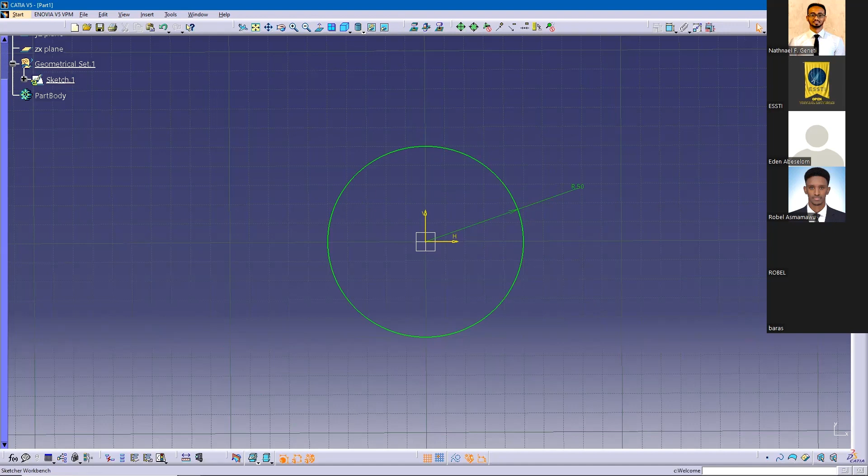Okay, and then what is it, as I told you from last time? Voila, you go out and then you press this button, and this is called a pad. You can increase the pad like this, and then if you press preview you will see the shape.

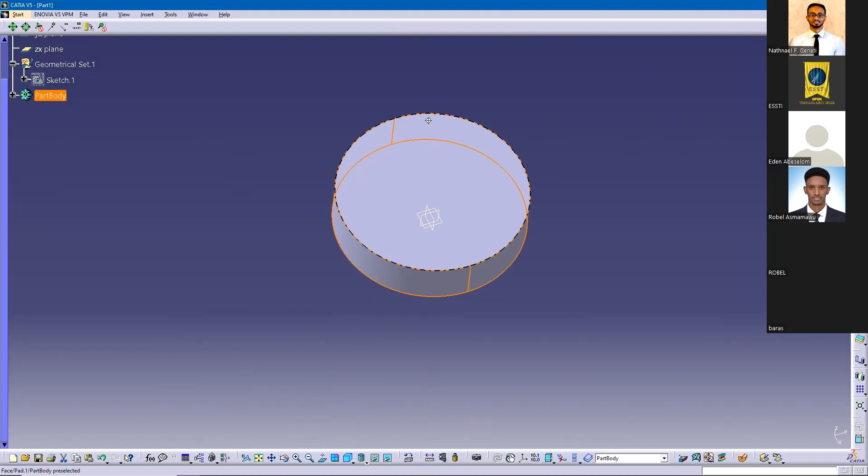Don't let it go. Okay, hold it together and then you just do like this. Okay, this is very important. This is how you manipulate, this is how you rotate a model in CATIA.

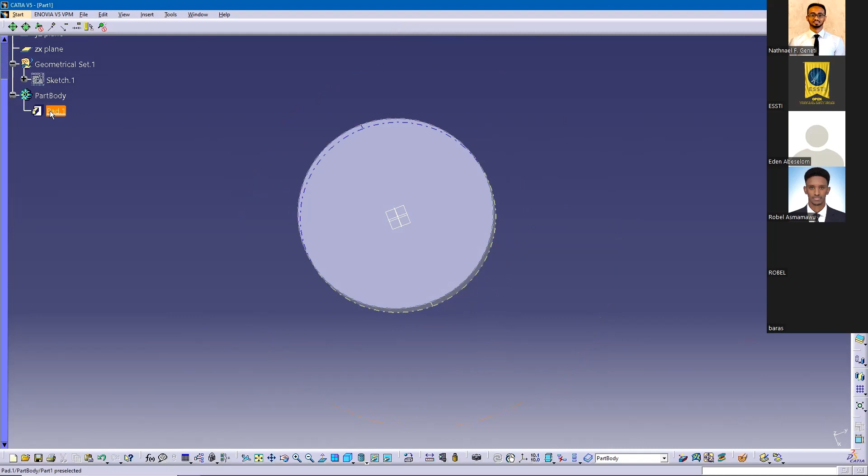How to create parameters and sketch, how to create parameters and how to create relationships. So first we have to go back to the sketch, okay? We have to go back to the sketch right here. And then let's hide the pad, okay? You can hide the pad from here, or you can go to the tree over here and just press this and then press the hide button like this.

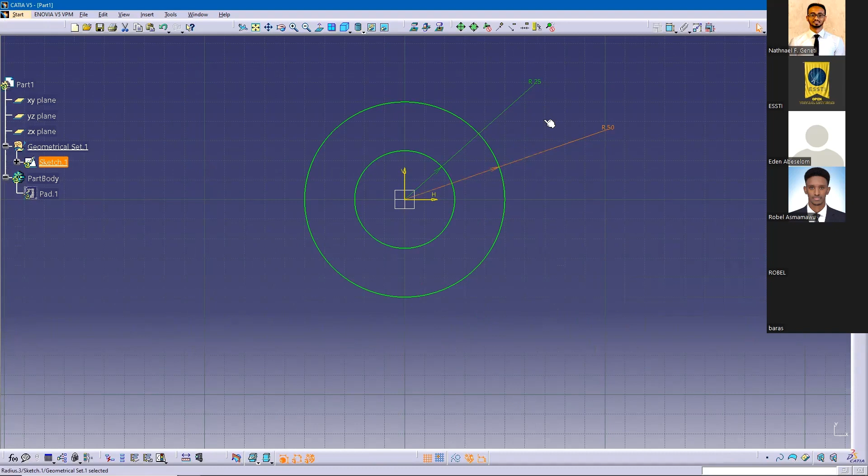So let's say I create another circle like this, right? And then let's give it a dimension, okay? Now let's change this dimension to, let's say 25, okay? So we have dimensioned it in terms of the radius. And now let's go out, okay? I want to show you this first.

From the last class, I've told you that in case something like this happens, press this button down here. Let me just bring it up right here so you can see it, and then press this button, okay? And then you'll be able to see the parts properly, or it will fit your screen. Now let's unhide this, and then let's zoom out a little bit.

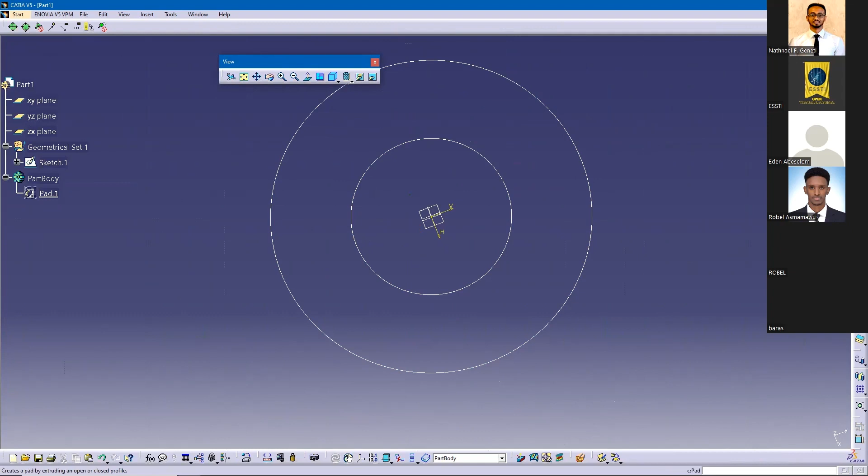So you can press the pad, okay? You can press the pad like this. Let me keep it right here. And then now we can select the sketch. Let's say we select these two, and now we say preview. Like this. And now let's unhide this. Okay, now we can see, right?

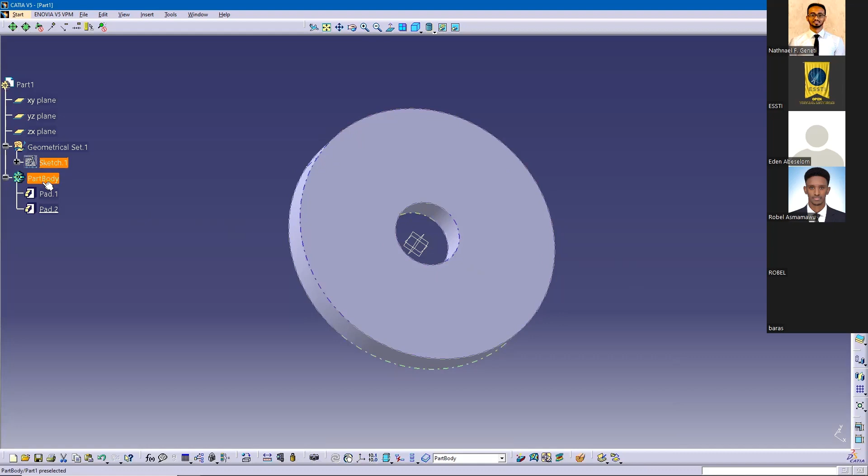Go back to the sketch. Let's hide the pad. And now, first, this button.

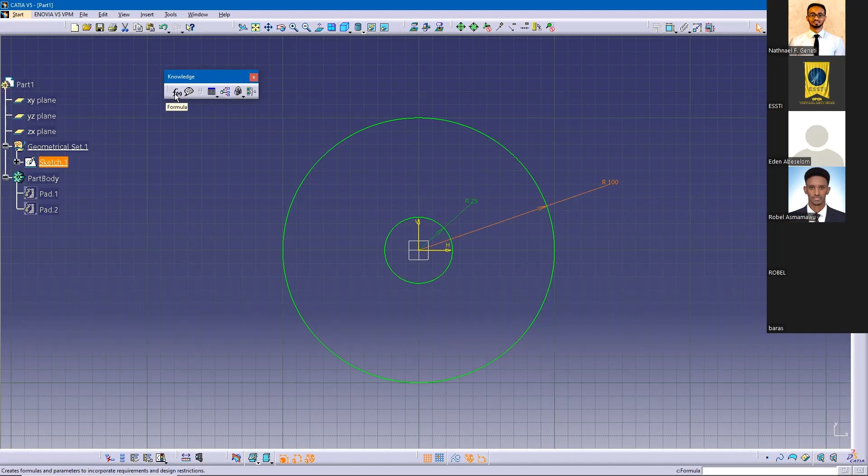This is probably one of the most important concepts that you should understand. This may be an intermediate course, but it's very intuitive to understand. So let's say I want to define all the dimensions in terms of the inner radius, okay? So to do that, I just press this. When I press this, you see it right here, right?

The Geometrical Set.1 / stuff, blah, blah. The value will be highlighted. That's what I'm trying to say. Now, once you highlight that, you can give it another name. Let's say RI, that's the inner radius. And then you press apply. So the name is now changed to RI. Earlier, the name was very long, right?

So it's going to be very, very difficult, because it's very messy. So this is how you change the name. And now let's say I select this one. After I select this one, you see right here, it will be highlighted. And now let's give this one another name. Let's name it RO, right?

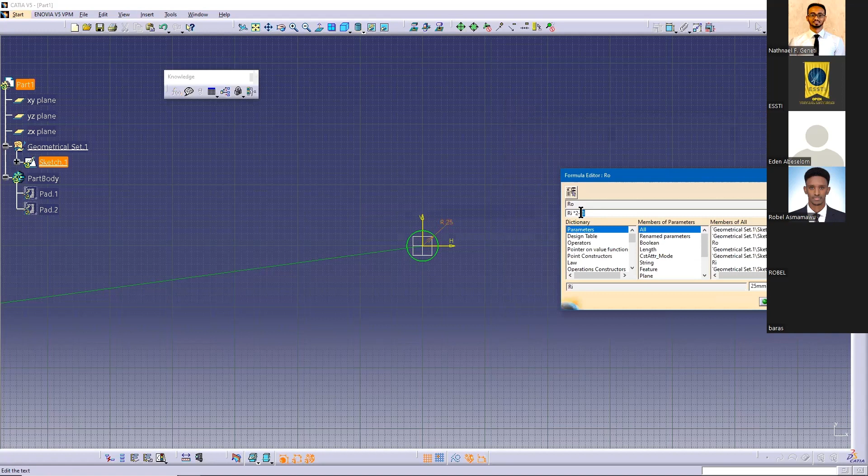And now, if I press OK, you see, it says there is something wrong with the syntax. Let me change that. Let's just forget about this one and multiply by 2 for now. Now, you see right here, the value is now 50. Earlier it was 100, now it's just 50. So there is some kind of relationship with the inner radius. So press apply and then you press OK.

And now, if you see right here, there is a symbol. It's very small, but it's an F with an X. That means this dimension is defined in a formula, and it's defined in terms of another dimension. How can I know whether it's defined in terms of another dimension? You just press it like this. When you press it, you see right here, it's grayed out. So what does this mean?

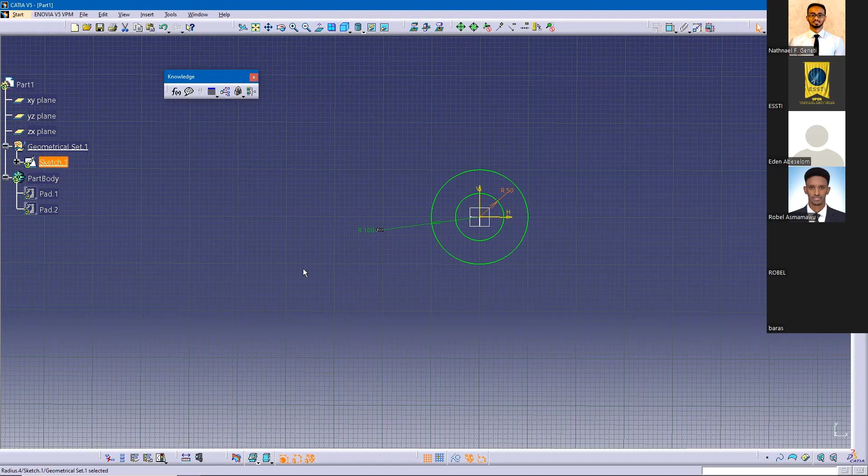If it is grayed out, it means you cannot change it right here. If you want to change it, you have to go here and press this one. And then let's make this one 50, and I press OK. You see right here, it will automatically update. So this is the power of using formulas. So now let's go out, press close, and let's say I want to show all the elements. You see right here, this is the power.

Something that I forgot to mention. Let's say I created a formula, right? So how can I access it? You want to be able to access it if you want to change the values or something like that.

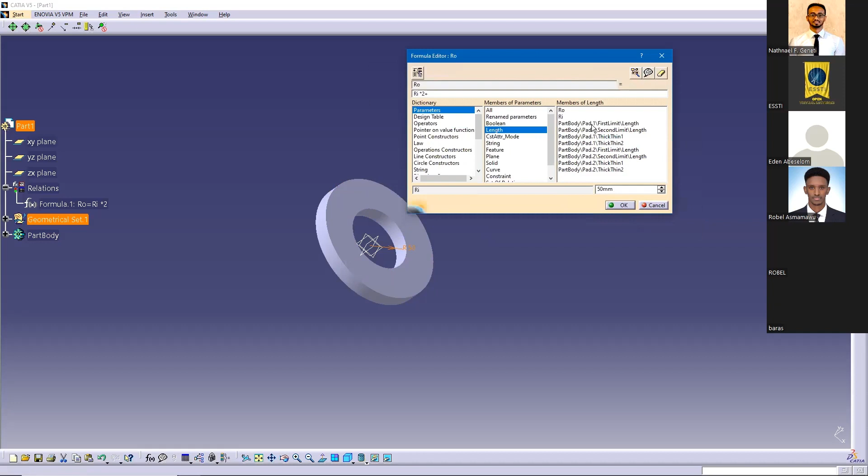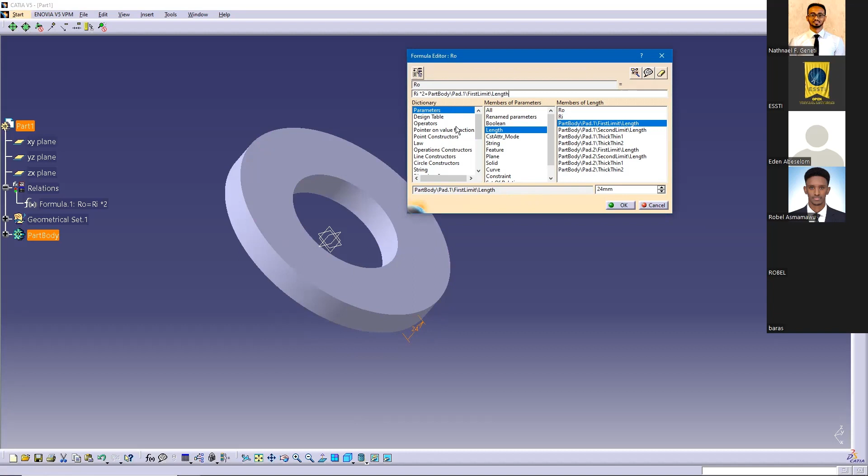And then bring it right here and let's create another. ለምሳሌ ኦኬ ብትሉት see the formula will be automatically updated ማለት ነው። እና በዚህ መልኩ you can use the relations and the formulas.

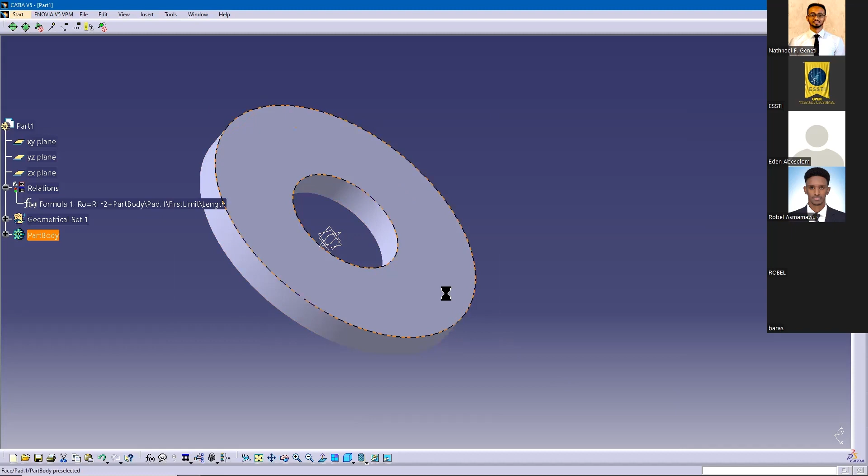So ይሄን ቪዲዮ ምናልባት በኋላ ለኮሆስት ይልክላታልና ይሄን ቪዲዮ እንድታዩት እመክራችኋለሁ ማለት ነው። Alright, so now let's finish this. Let's end this right here. እዚህ ጋር ያለውን ይሄን እንጨርስና maybe let's delete this. And let's delete this. You can also hide it if you want to. ሌላ ነገር ያው ስለምናወራ ብዬ ነው። Delete this, okay? So that's one point.

And now I want to show you the other modules that are available within CATIA, okay? በጣም obviously ማወቅ ያለባችሁ መጀመሪያ ከፓት ዲዛይን ቢሆንም that by itself is not enough. You must know other modules. Probably the most common ones that any mechanical engineer would use are the assembly design, the sheet metal design, the wireframe and surface design, and the generative sheet metal design. These are very common.

Let's say I want to put all of them together, because if you see right here, it's very messy. Like if you want to find generative sheet metal design, you have to go down like this, and that can be very tedious sometimes. How can I change that? Let's say እዚህ ጋር ክሊክ ሳደርገው በቀላሉ እዚህ ጋር እንዲመጣልኝ ማለት ነው። How can I create a shortcut? How can I do that?

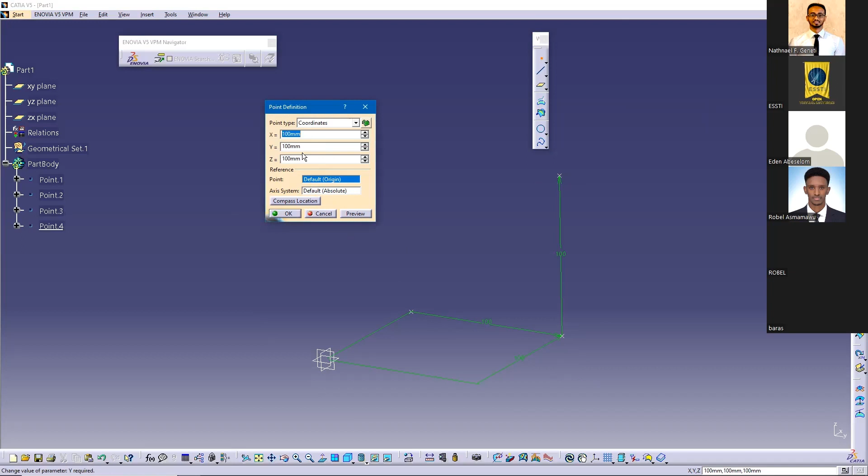And then what does x 100 millimeters mean? From that point it will go like this, another 100 millimeters, and then it will go up another 100 millimeters. Then the point will be right here. So this is the location of this point, and now you press OK, and it will just continue to give you another box. Let's keep this one as 0, let's keep this one as 0, and let's press preview. Okay, and now we have created enough points.

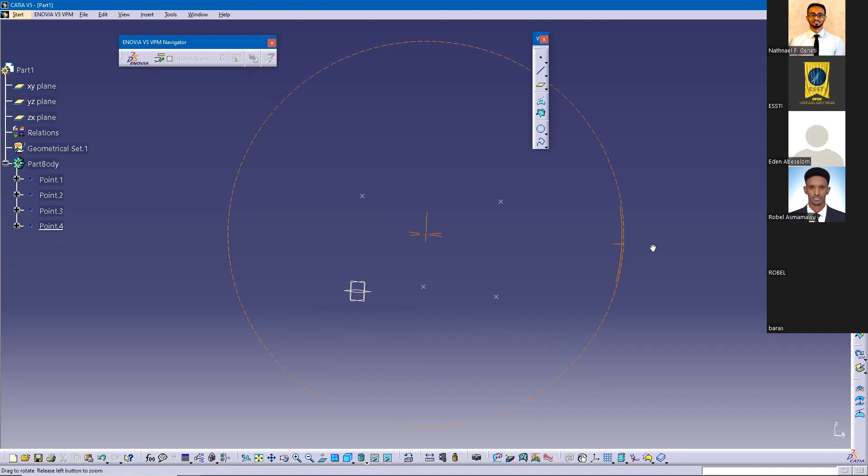Just press escape. Always remember, in CATIA or probably most software, the escape key is the key that you press when you want to finish any kind of command. Okay, so we have created 4 points, and now I'm going to create a line between these points.

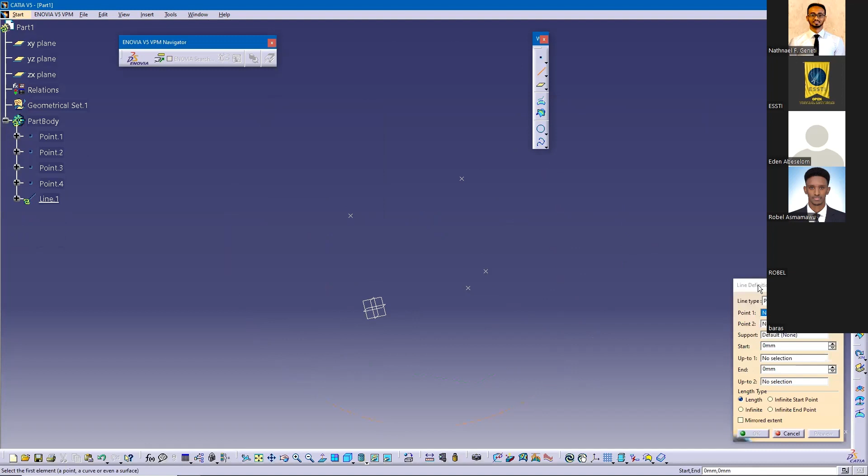So as I told you before, because right now I'm going to create multiple lines, I double click on the line, and now there are many different ways that you can define a line. So here, under the line type, you see point-point, point-direction, angle/normal to curve, tangent to curve, and many different kinds of definitions. I'm going to try to explain the first 3 or 4, and the rest you can explore by yourself.

Let's say point-point. So you press it, and here it will ask you the first point. Let's say this is our first point, and now it's going to ask you the next point. Let's say I'm going to pick a point here, and now you see we have created a line between point 1 and point 2. And now it's going to ask you for support. You could just leave it like this; the default is none. So let's press preview, and now we have created our lines.

And you can also extend this line outwards. You don't necessarily have to finish everything right here. To do that, you see right here the start and the end boxes. Let's say I increase this. See this point. The point is right here, but we are just increasing the length.

Or another way to do that is you go close to the start, and then you see the arrow right here. Press that, and then just drag it out like this. Same way on the other side. You go here, press this, and you can drag it out like this. This way you can create a line. This is one way to do that. What is the other way to create a line? The other way to create a line is a point and a direction.

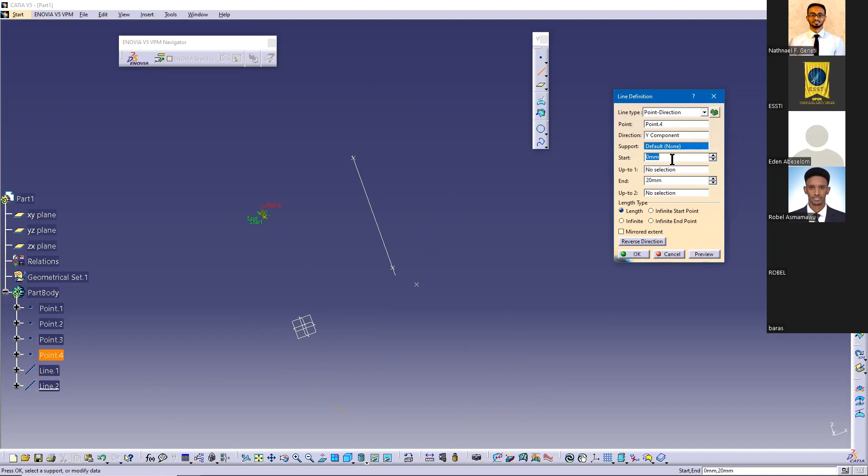So what does a point and a direction mean? Let's say I click this point, and now it's going to ask me for a direction. So here you can press the right click, and right here you're going to see many different options for defining a direction. We can select, let's say, the Y component, and now we just press preview.

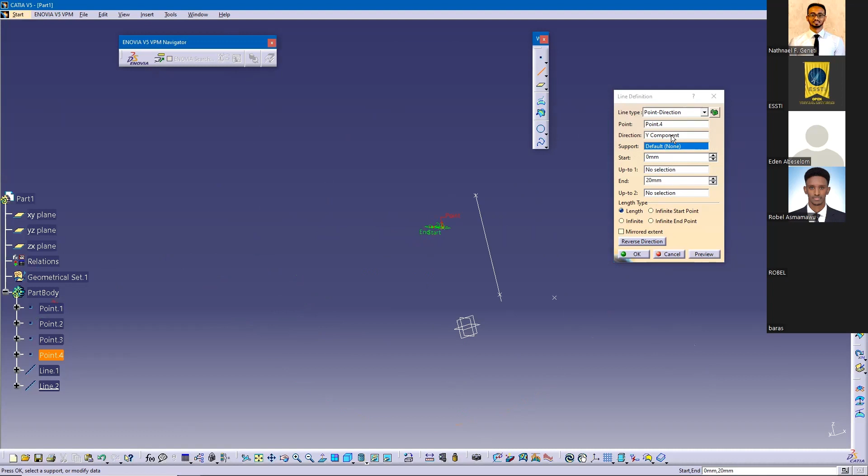Okay, so if you see right here, we have created a line with a length of 20 millimeters. In which direction? In the Y component direction. So what does the Y component direction mean? The Y component direction is the point's Y direction. Remember that.

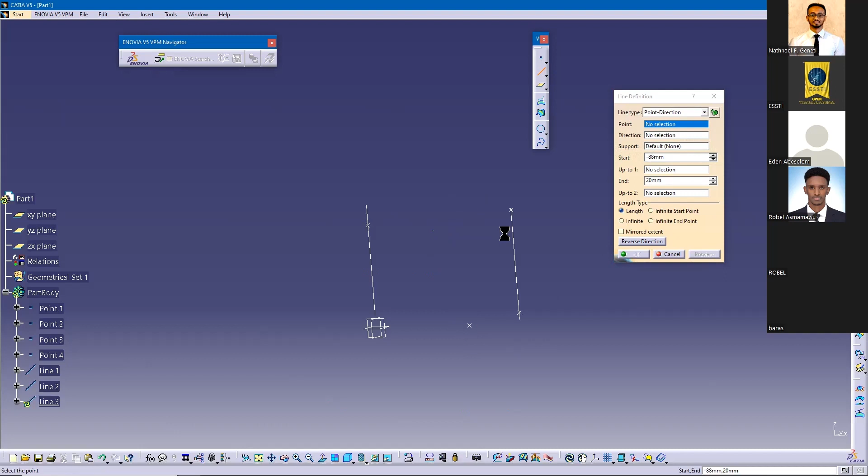What else can we do? You can also change the X component, or change it to the Z component. And now you can create a point like this, and you just drag it like this. And now you create another point, and then press OK. And now to save time, let me just go back to the point and just do this. All right, so let's just press escape.

One thing that I forgot to mention about points. To define a point, I told you that you can use the coordinate system, but there are also other options. Let's say you can press on curve. So what does on curve mean? You select the curve. Let's say this is a curve. By the way, a line is considered as a curve in CATIA. Please keep this in your notes. This is a very important point. A line is considered as a curve. A circle is also considered as a curve in CATIA.

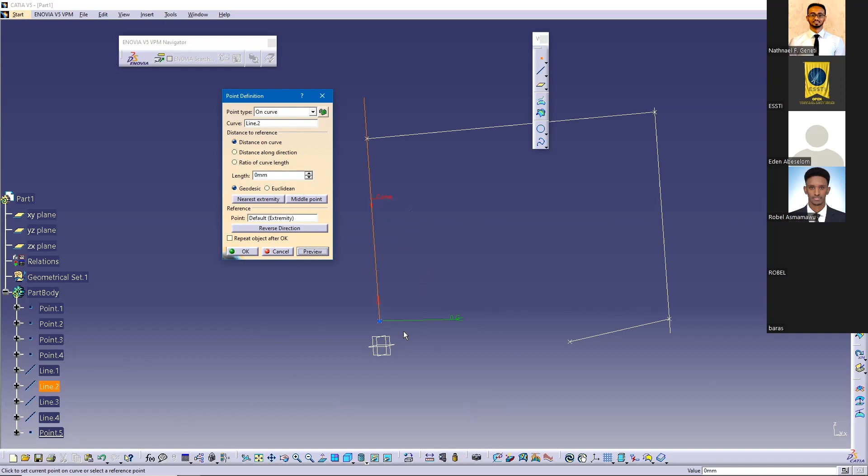So you press on curve, and now you can give it a length. Let's just give it 40, and now you press preview, and you create a point. Another thing you can do is press 0, and if you press 0, the point will be created at the start point of the line, and then you press OK. So we have created another point. So let's connect it. Press this point, press this point, and press OK. So we have created a 3D wireframe within the wireframe and surface design.

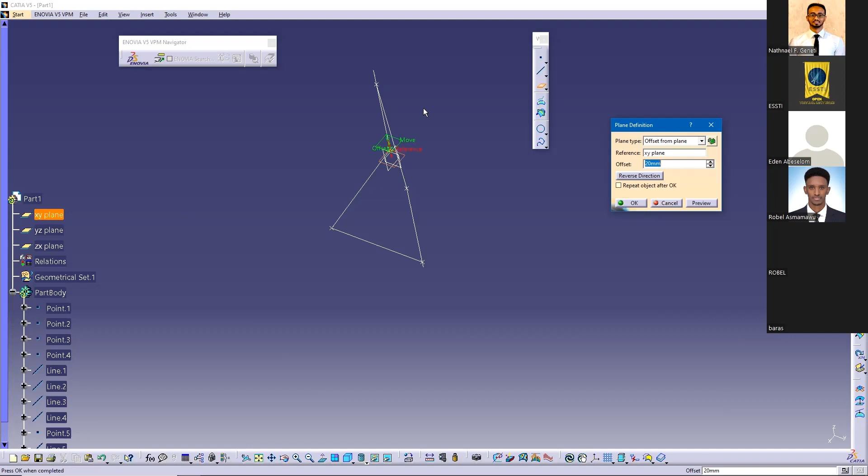The next step is I want to talk about the plane. What is the plane, and how to use it properly. So you press the plane, and here you will have this box. In the last lecture, I explained how to use the offset from plane. Let's say we have the X, the Y, and the Z plane, and now we want to create a plane that is parallel to the XY plane at a distance of 20 millimeters. To do that, for the reference, you press the right click and choose the XY plane. So you see this green plane. Now maybe you can increase it like this, and now we have created our first plane. This is the offset from plane method.

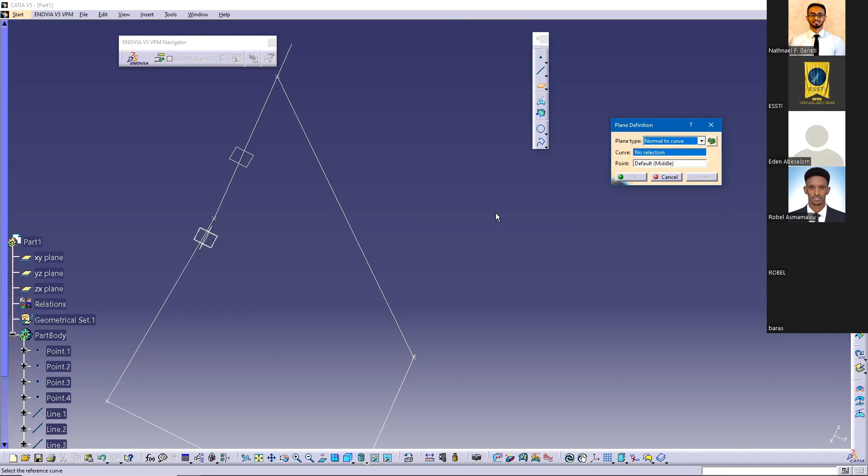Another method for creating a plane is a plane that is normal to curve. This is probably one of the most common commands within the CATIA software. You see this one, normal to curve, and now it's going to ask us which curve to use. So we can just select this one, for instance, and now it's going to create a plane that is normal to this line. But the default case is the middle of that line. But what if I want to keep it to the edges? To do that, after making sure that the point section is highlighted in blue, you can press this point, and it will automatically move to that specific point.

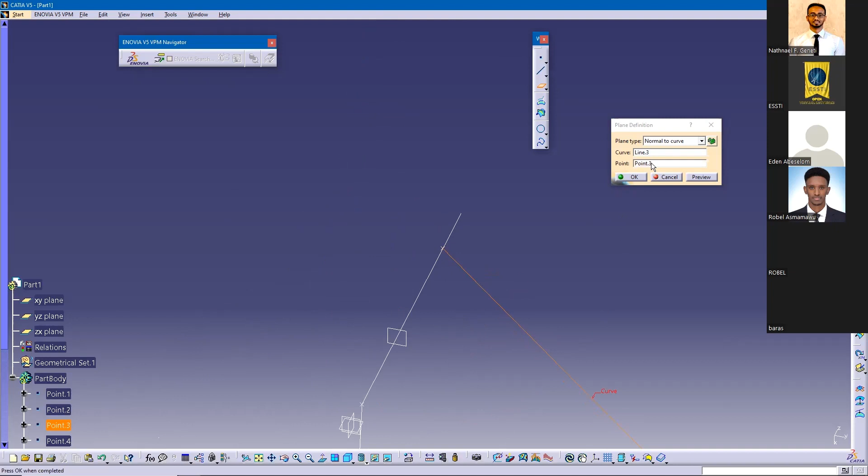Or let's say I want to move it right here. To do that, you just press this point, make sure that this is highlighted, and then press this point, and then it will be like this. So this is what you should do to get a plane in this way. Maybe I can show you one more. You can also create a plane through 3 points and through 2 lines. I want to show you a plane created through 3 points. So after you choose this option, you have to select the points.

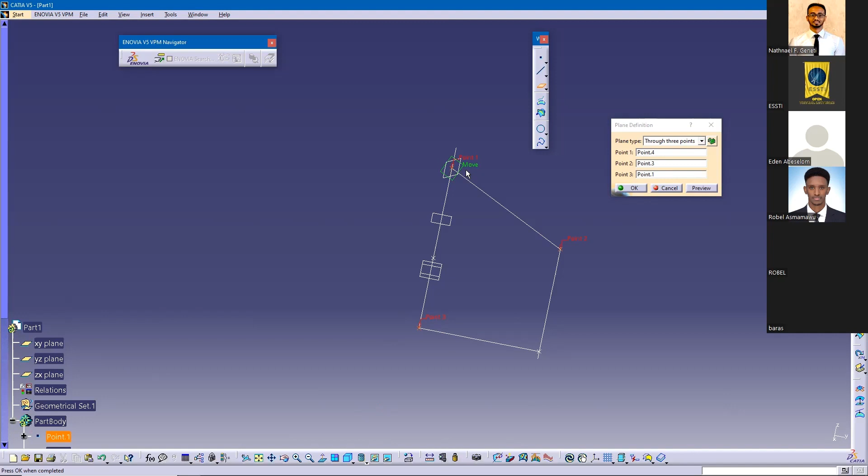To do that, after making sure that this is blue, now you select this point, second point, this one, and then you press this point, okay? So we have created a plane that goes through this point and this point, and automatically the plane is assigned to the first point, okay? And you can move it like this, maybe somewhere in the middle, something like this, and I press OK. Now you have created a plane that goes through each of these 3 points.

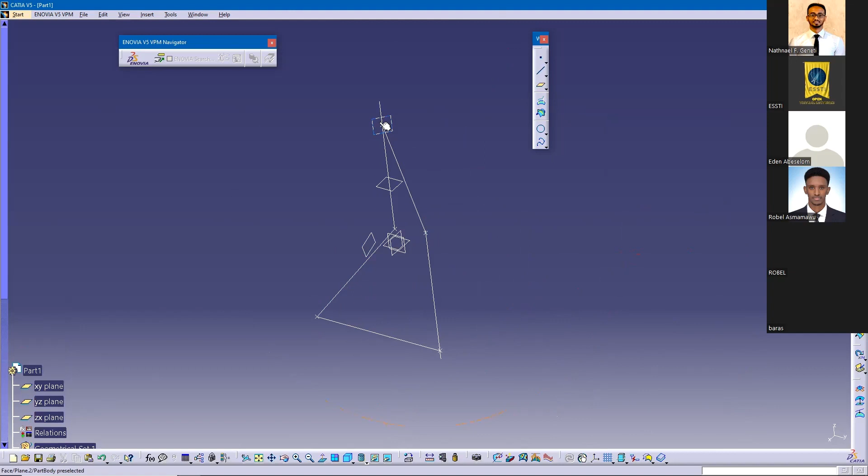So please, I highly advise anyone who's a beginner in CATIA to spend 1 month, 2 months, however long it takes to fully understand how to use the plane and the lines and the points properly. Because if you don't understand these 3, you'll never be able to make any meaningful progress within this CATIA software.

So let's just hide all of these planes. You can press hide, and also you can go to the specification tree and just select this one, hide, and hide, okay? So this way you will be able to make points and lines and planes.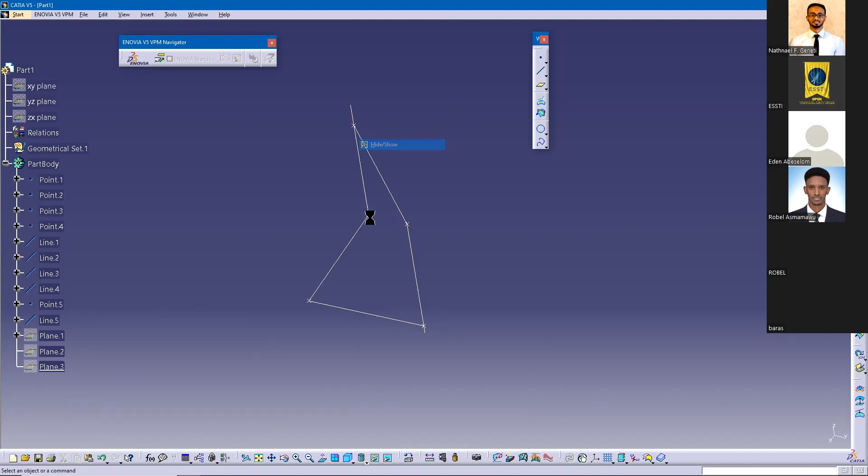All right, so the next step is let's now go to another important surface-based features, okay? So in the part menu, we had surface-based features. In the wireframe and surface design menu, we have the same features. So I'm going to try to explain some of them to the best of my knowledge. So the first one is called the extrude, right?

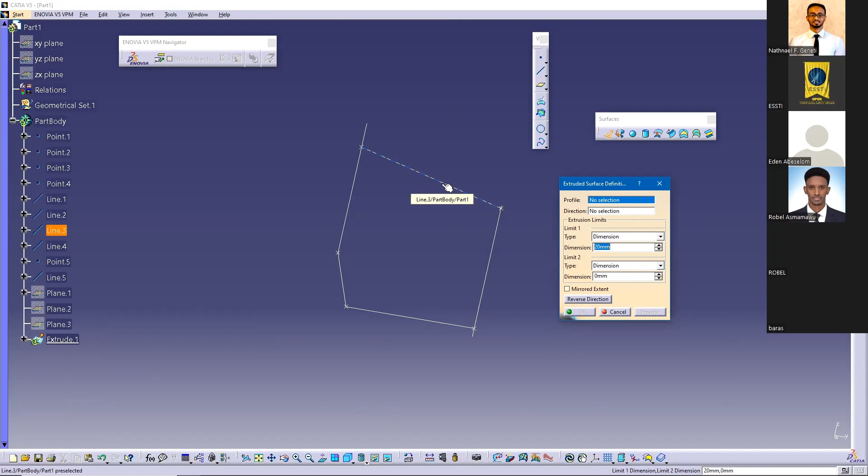So when you click the extrude, a new window will pop up like this, and now we have to select the profile that we want to extrude. Extrude means you are trying to create a surface that goes through that specific curve that you created. So let's say we click this line, and now we have to select the direction. Let's say I select the X direction. And now we can make it mirrored so that it goes both ways.

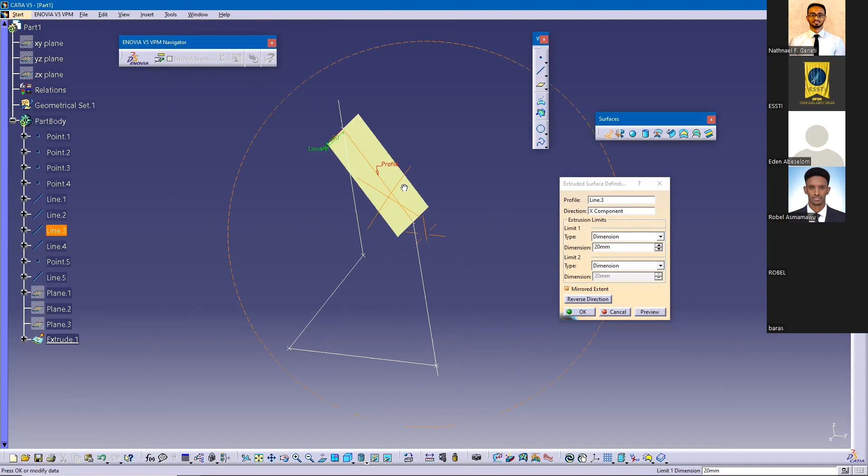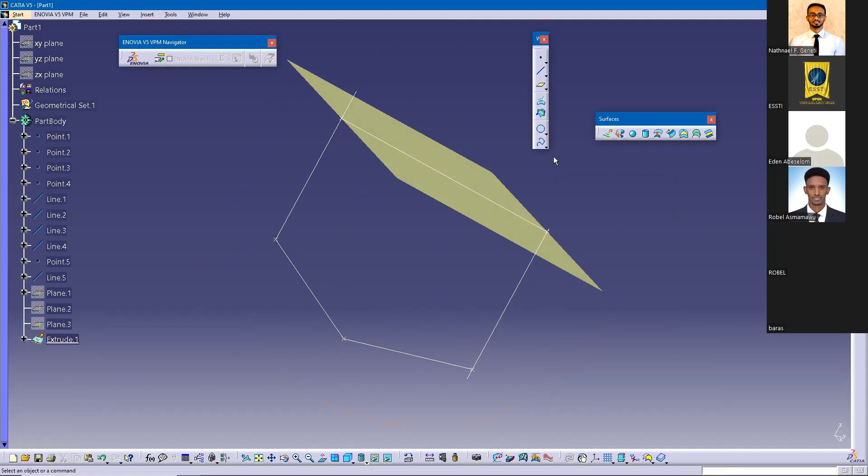Now we can increase the dimensions like this, and now you'll be able to see a surface that has been extruded based on this command, and you press OK. See, this is the first method for the surfaces toolbar.

All right, so maybe I'm gonna delete this and show you this icon. This is called the fill icon. It's also a very common command that people use, especially mechanical engineers and aerospace engineers.

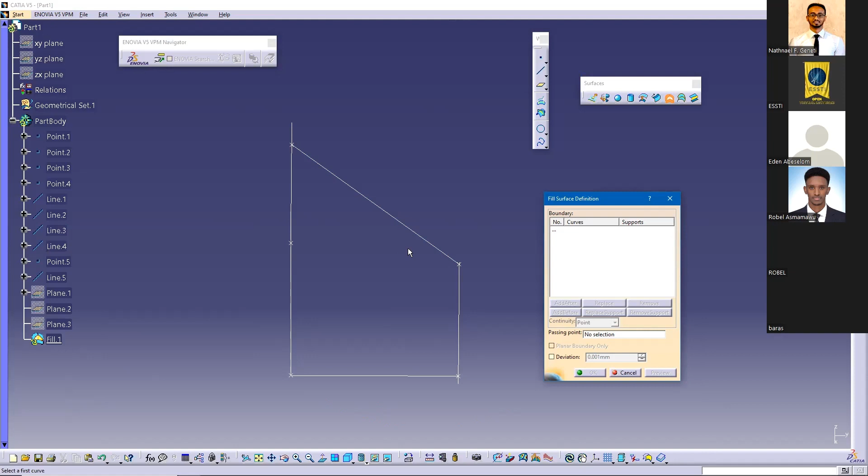So you select this line, and now you have to select the lines sequentially. That means you cannot just select this line and select this line and go to here and go to here. You have to do it sequentially. If you're going this way, good. If you're going this way, that's also good. Whether it's clockwise or anti-clockwise, that's okay. But make sure that they are selected sequentially. So let's go this way.

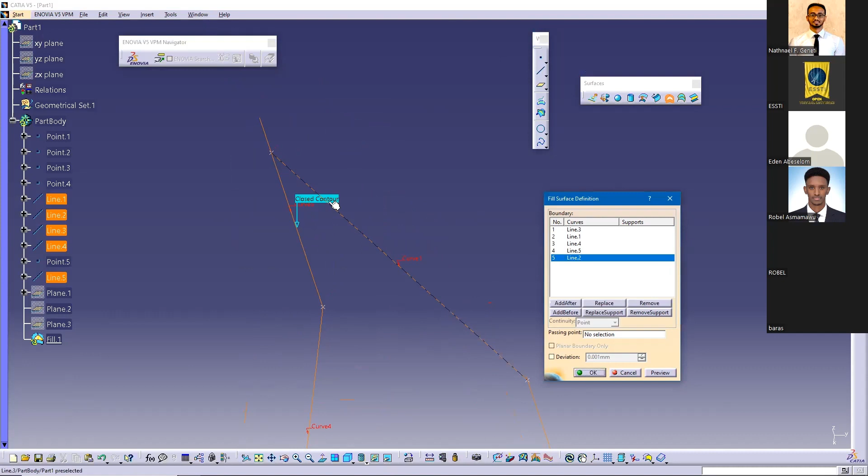You see, when I select the lines of the curves, they will appear right here in their order. 1, 2, and now this line 4 will be number 3, and then line 5 will be number 4, and then this will be our last line. When you do that properly, you see, the closed contour will appear. That means you have done a good job and you have made a closed contour. So after you do that, you press preview. Okay, so you have created your first surface.

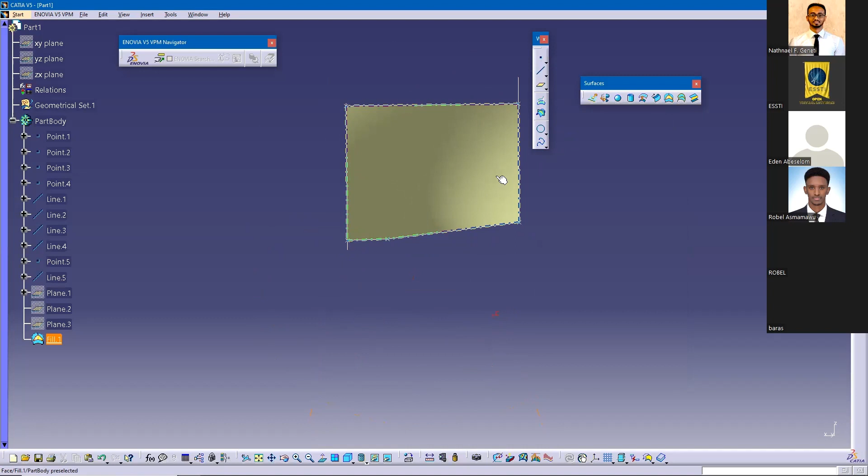The wireframe and surface design and the generative shape design is highly employed for car designs and, let's say, jet designs. This is very commonly used, so you really need to spend some time to understand these two modules properly.

So I have been talking for 48 minutes. Everyone, are you following me? Do you have any questions, or do you want to take a break? Hello, everyone. Mr. Machino?

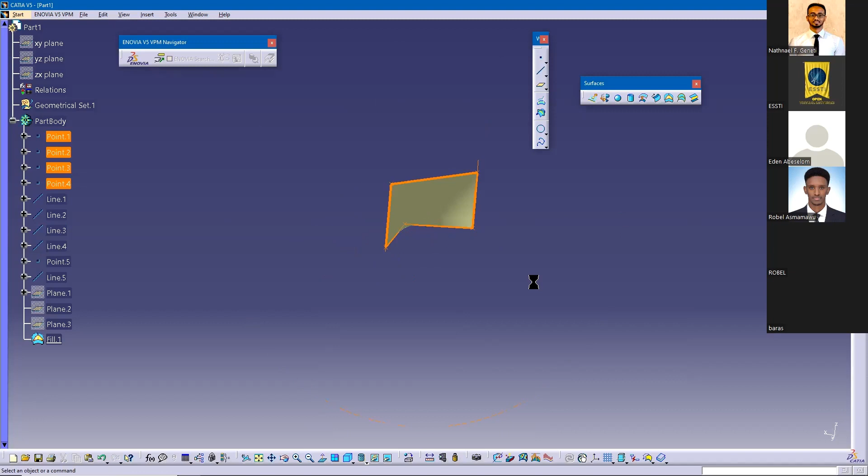I'm going to continue. So what I want to show you next is, let's remove all of this.

I want to show you the other tools. What are these tools? The sphere and the cylinder. The sphere is basically you're creating a sphere, but you have to create the center for it. For the center, you can press create point, and now it will take you to this point definition, or maybe you can just use the coordinate system. Let's say I'm going to give it just 0 millimeters, preview, and now I press OK.

So we have created the center for this sphere, and we also have to select the axis for it. The axis is automatically selected by default, but in case you have multiple axes, this is where you're going to change your axis. And for the radius, you can give it higher values. Let's say 100 millimeters. And then, see right here, the sphere limitations.

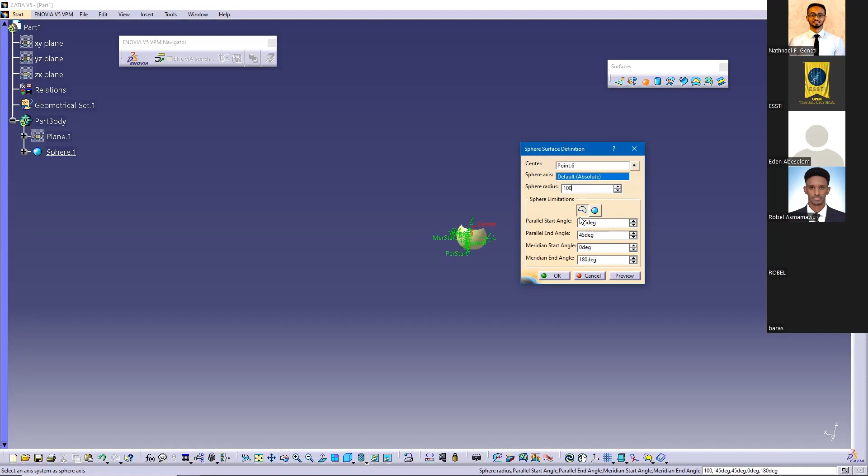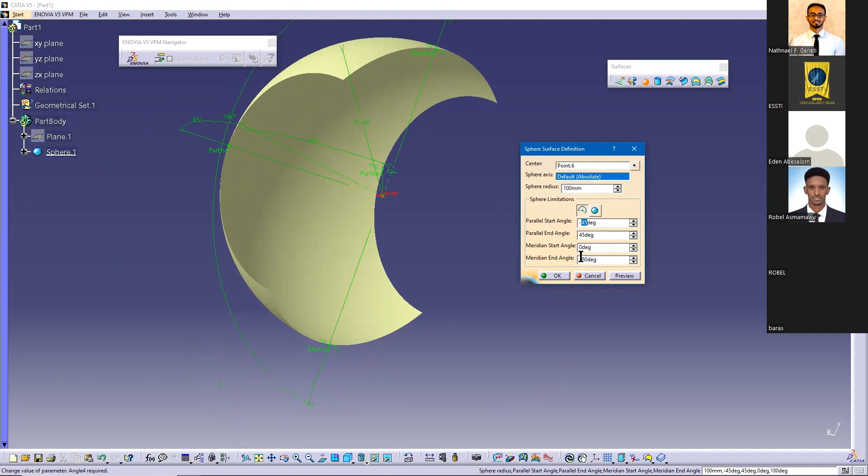There are two options. You can create a full sphere, like a ball or something, or you can create something like a half sphere or anything. It's up to you to decide the limits for each edge. To do that, right here you can select. Let's say I'm going to make this one 60 degrees, and you press preview. This is what happens.

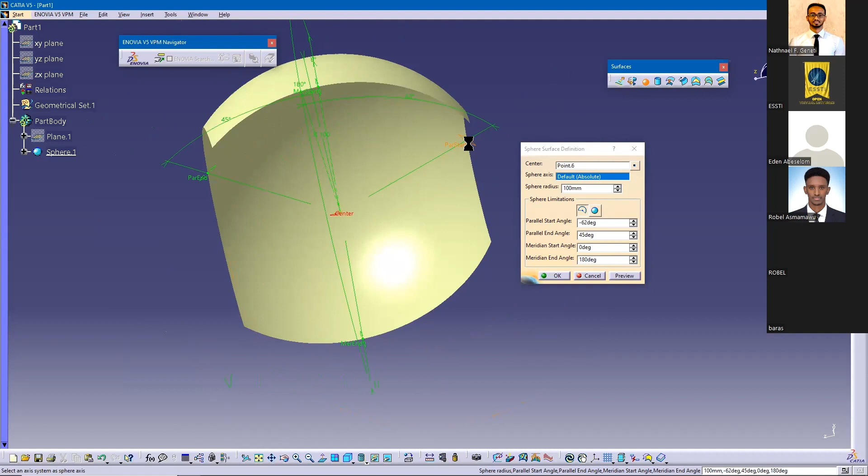And by the way, you can identify which one is which. If you press the edges, or if you press this button like this, it will tell you exactly which one is increasing or decreasing. Right now you've seen the parallel start angle, and there's the parallel start angle and the meridian start angle. Meridian, if you remember from geography class, is this way, the outside surface like this, and the parallel is basically up and down, and this is how you can create a sphere.

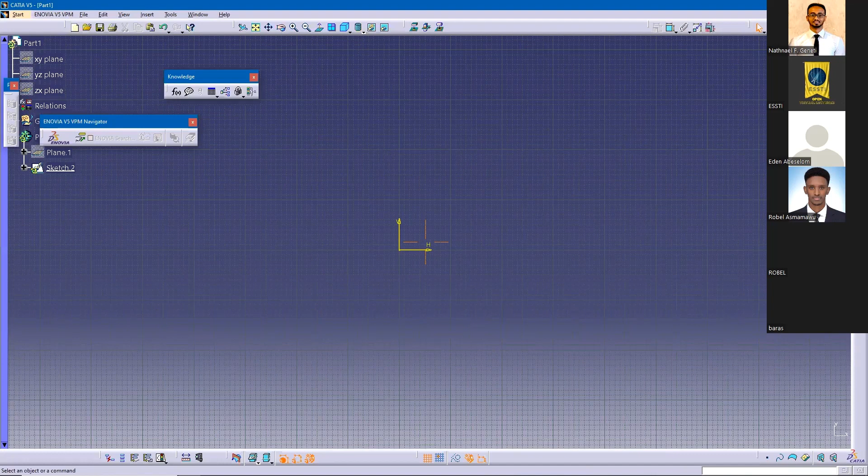Now let's say I have made some drawing. You can also make sketches within the wireframe surface design. To do that, just select the sketcher, select the XY plane, and you can make a circle like this, and you dimension it properly. And if you dimension it properly, you also have to make sure that it's constrained.

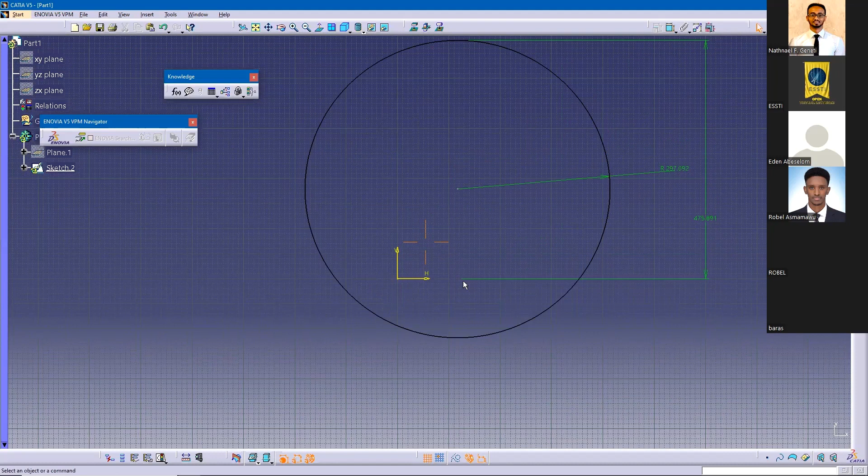So to constrain it, you can select this one. You can constrain it from the vertical distance, and also from the horizontal distance, like this. So this one is from the horizontal up to the end, and now we have to constrain it from the vertical. So this one and this one. So this is now fully constrained. You can constrain it like this, and you go out.

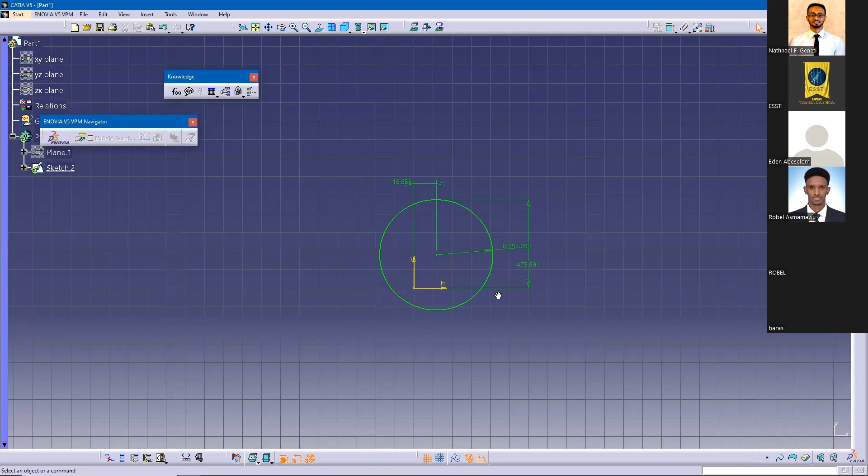And now let's fill the surface. Press the fill, it will automatically select the sketch, and we press preview. And now we created our first sketch. And now let's say I'm going to create another plane. This one down.

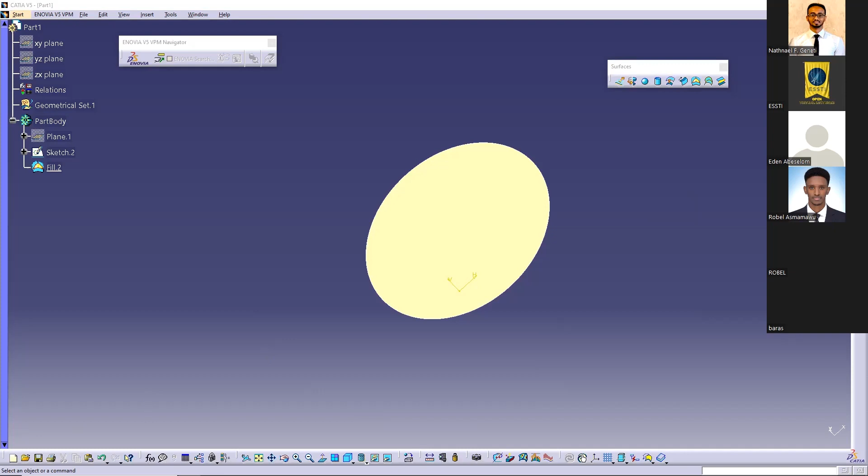So now I'm going to create another plane, and the plane will be offset from plane. So you can do offset from plane, or, I'm sorry, tangent to surface. You can do tangent to surface. For the surface, you select the surface, and then this is the point. So you can create a point for it.

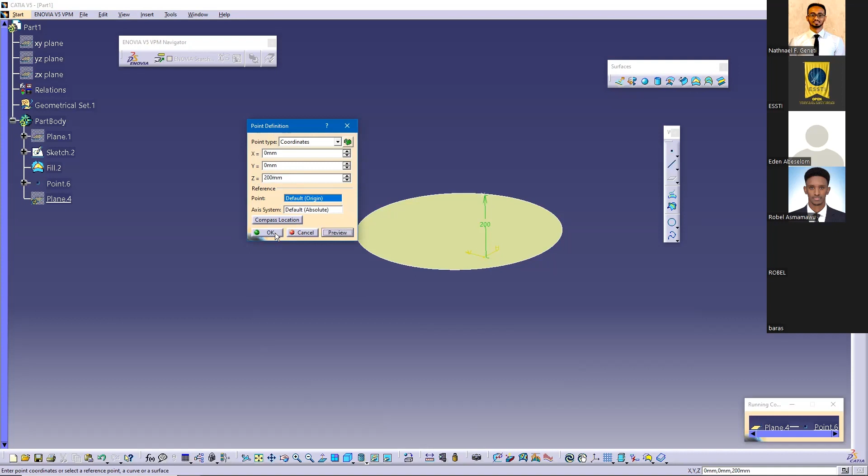Let's say not on curve, for instance, coordinate system, and now you can increase the distance. Give it 200. Not 1000, that's too much. 200. Okay, and press OK. Now we have created a plane, right? So on this plane,

I'm going to draw another surface. Let's say I'm going to create some rectangle like this, and you go out. I didn't dimension it and I didn't constrain it, but that's something that you should do for yourself.

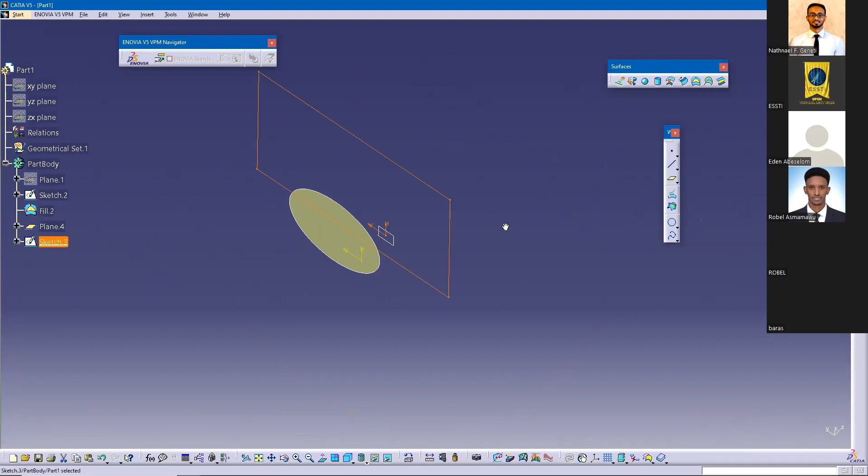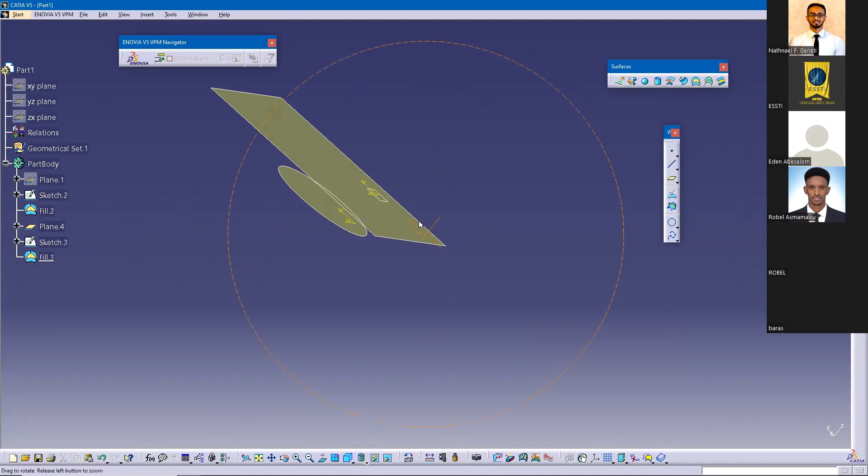So I have created another surface, and now I'm going to apply the same procedure that I've done earlier, which is the fill. You press the fill, like this, and then you press preview, and you have created another surface. And now what else can I do? This could be another good

recapitulation for you. Last class, I told you about how to project an element or an edge. I'm going to do the same thing right here for the sake of education only. But normally, you don't do it like that. You have to do it in the easiest way possible. But this is a tutorial, so I'm going to do it in this way.

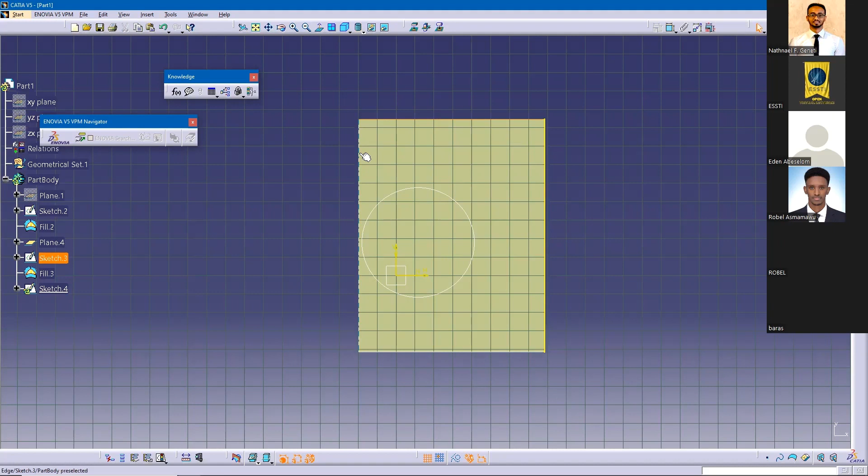Let's say I'm going to select the surface. And now I'm going to sketch on that surface. To do that, I will press this button. I'm going to press project 3D elements and select each edge like this, and finally like this. Let me see. We need to select it together. Like this, another edge like this. Oh, sorry.

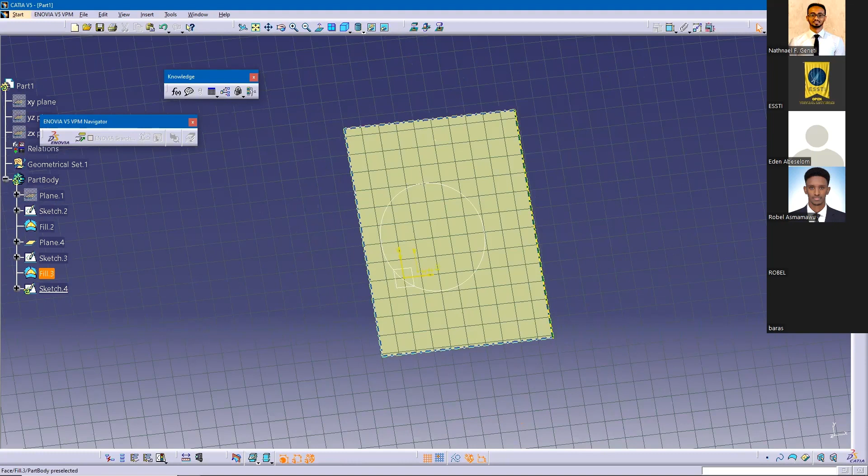Select this one, and this one, and we go out. So we have projected the edge of the surface. Now let's hide this one. So as I have mentioned at the beginning of this course, whenever the line is highlighted in a yellow color, it means that is a projection.

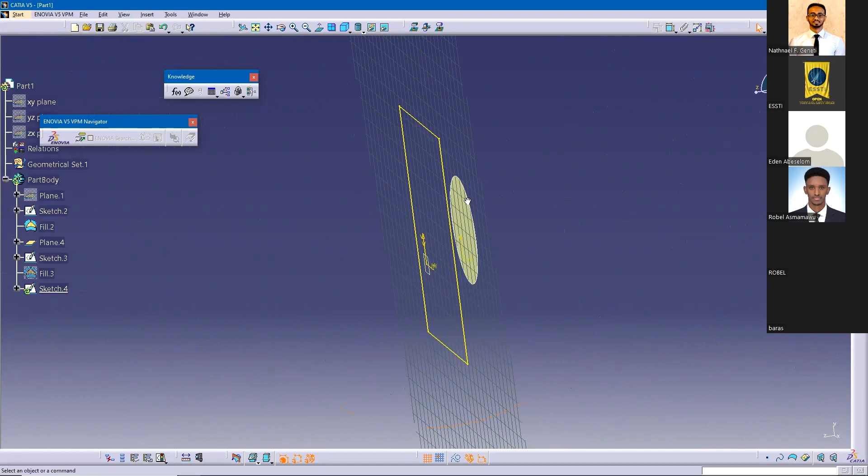Okay, projection means anything can be projected. Maybe the edge can be projected, or even the axis system can be projected. But if it is in yellow, then it means it's projected. And now we're gonna make this line hidden line. And to do that, you can always go down here.

So not hidden line, but a construction line. Press the construction line, and you press again. Let's select all of them together, and now let's make them a construction line. Okay. So now the line has been a construction line. So this also has to be construction. So this one also has to be a construction line.

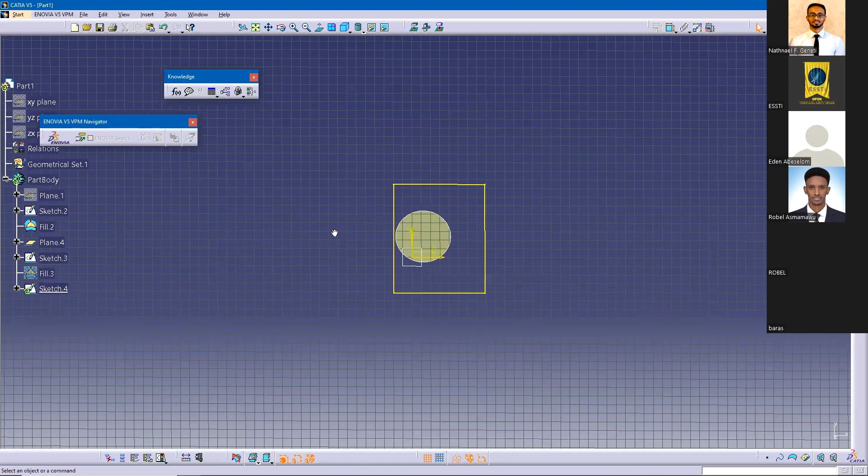So we have created a construction line, and this is how you can make a construction line. But for now, let's just go back to just how it was. Maybe just let's keep it as a solid line, and now let's go out. Okay, and then you can bring back everything. Let's bring back everything. Okay, and so now I want to extrude it again.

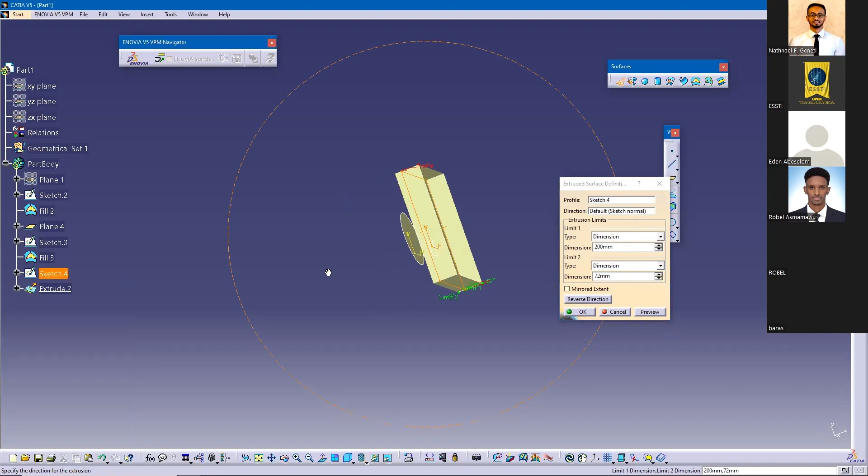I'm gonna extrude the sketch. Okay, this one. Now let's say we want to extrude it more. Let's increase it to 200. Preview. Let's reverse the direction. You see, something like this. Maybe 200 is too much. That's okay. So we have extruded to 200.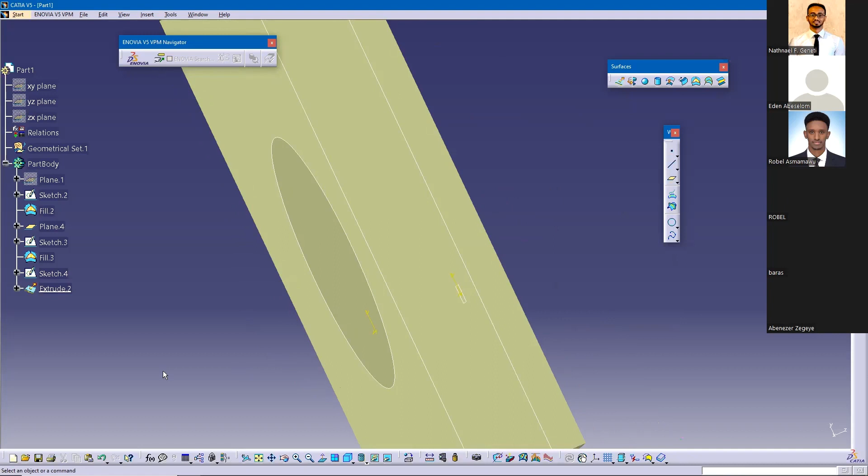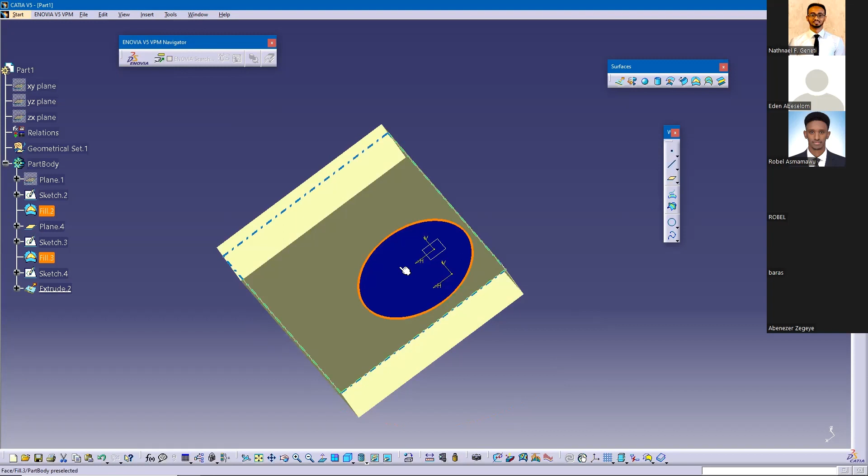I'm gonna put this right here. And now what I want to show you is, let me just change the color of this so that I can easily show what I'm trying to do. And now let's say I want to project this element on the surface. Okay, that's what I want to do. Okay, so to do that,

over here there is a projection right here. So now the element that we are going to project is this one. So we have to select this element. The projected element, you can also select it from here. So we're going to select this one, and we go back again, and this is the fill. So select the fill and select projection, and now we can project.

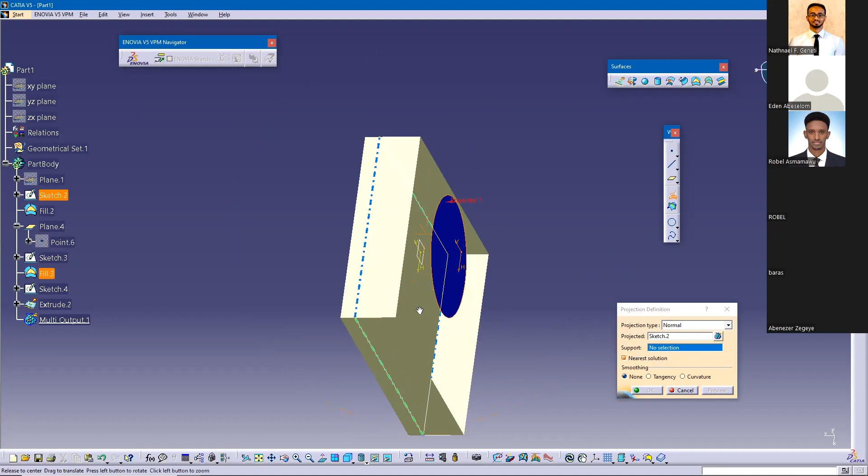Let's say this sketch on this surface. Okay, this is the surface that we want to project it on. So for the surface, we're going to select the bottom surface like this. And now if you press preview, see right here, there is a circle that's going to be created on the bottom surface like this. We press OK. This is how you can project an element.

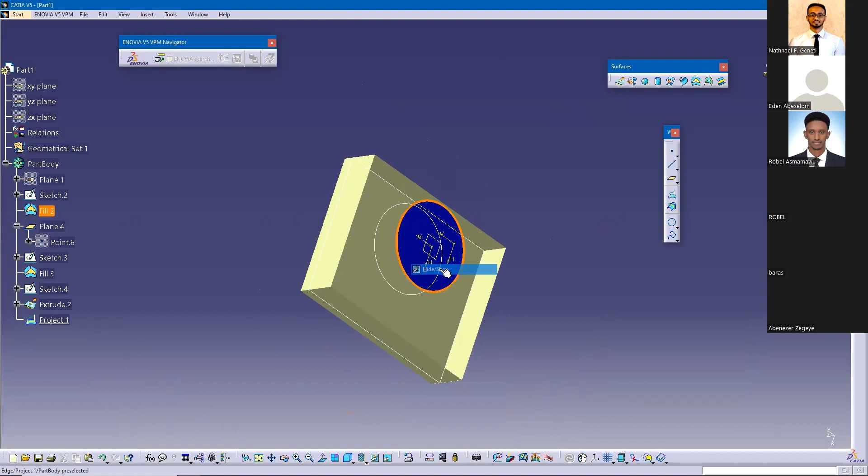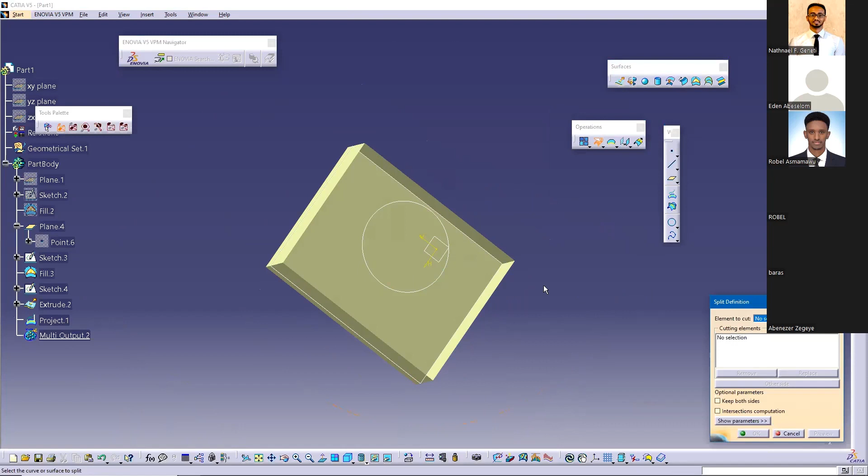And now you can also trim the surface using this projected element. To do that, over here is the operations toolbar. You can press split, and now it will ask you which element to cut. So for the element to cut, we are going to cut the surface, and now the cutting element will be this projection.

Okay, see, now we have created this kind of structure, and you can also change it to the other side. That means instead of removing this part, we're going to remove the outside. So to do that, just press other side. So this way you can create something like this, but let's keep it the other way. And you press preview and you press OK.

Maybe for one day this is too much information, and I think right here I should stop going into too much details, because you can learn all of this on YouTube. I highly recommend everyone to check out some good YouTube channels.

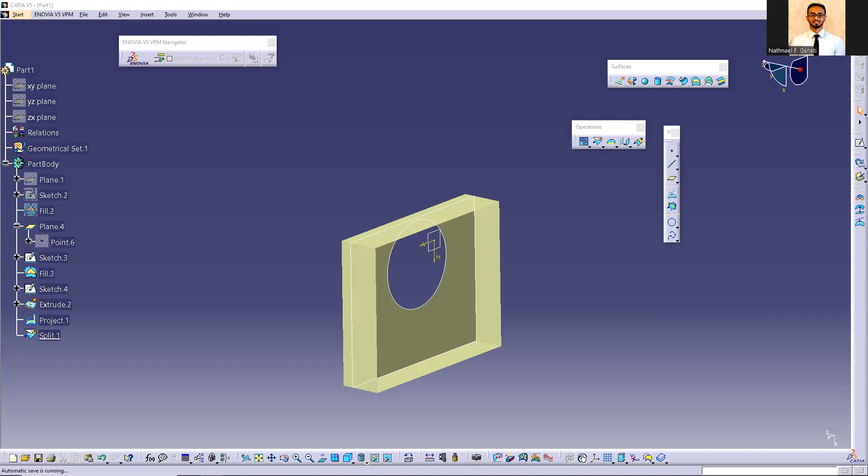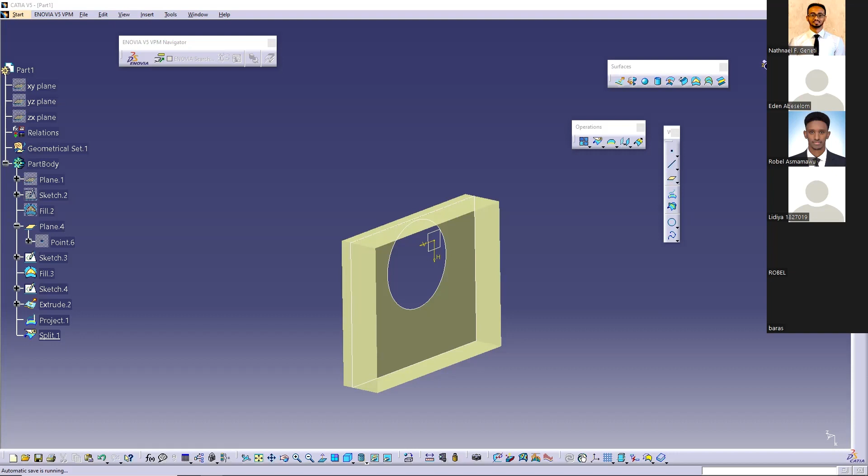If you want to easily find material, search CATIA files online and you can always find any kind of materials that you want.

I want to make sure. Yeah. Hello? It's showing now. Okay.

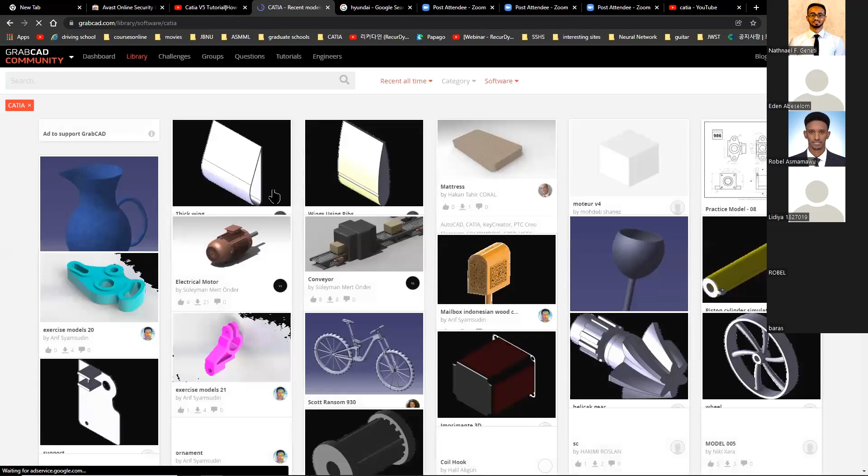You can download any of them, and when you download, make sure that the extension is CATPART, or if you're trying to download, let's say, a product within CATIA, make sure that the end is what is called the

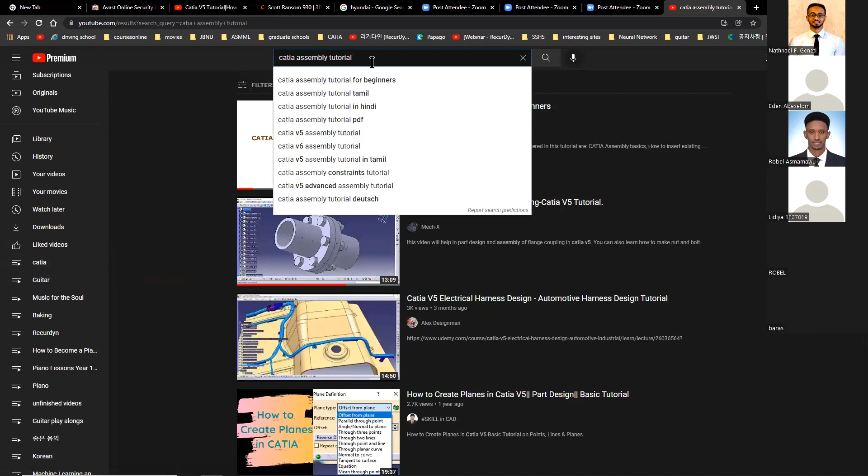Just go on YouTube, search CATIA assembly tutorial, maybe just for beginners, and it will show you some good lectures.

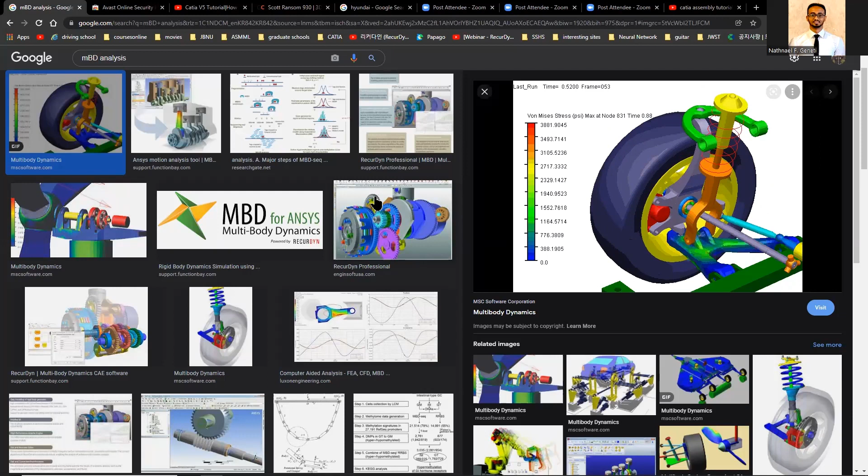It looks like we have to study so many things, but in reality it's not like that. All you have to remember is just know how to use some softwares, learn new skills on a daily basis, and you will be surprised after a short time. And I think that's pretty much what I have for today.